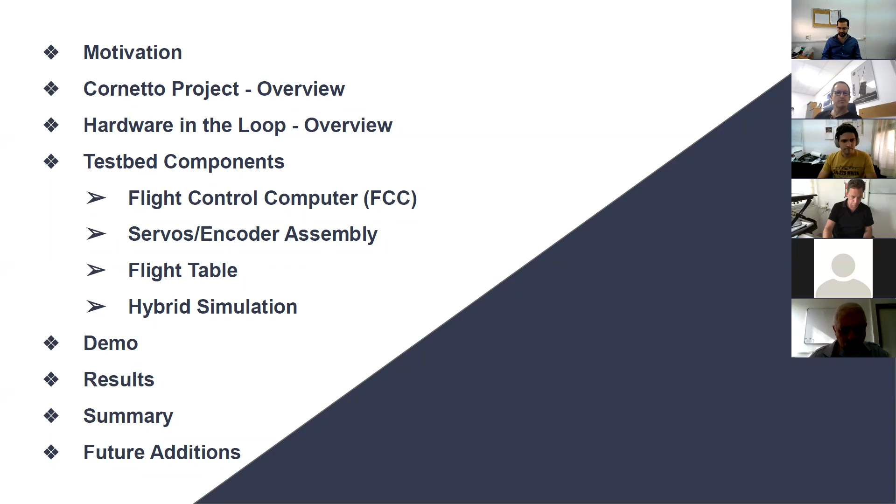Let's begin with the motivation. What we're trying to do is create a hybrid simulation for validating guidance, navigation, and control algorithms from inside the lab for a low-cost research missile. So what we're trying to do is combine physical components with mathematical models. Physical components would be those of the missile, such as the flight computer, servos, etc. And the mathematical models would be the flight dynamic model and the virtual IMU and other components that we will be discussing in just a moment.

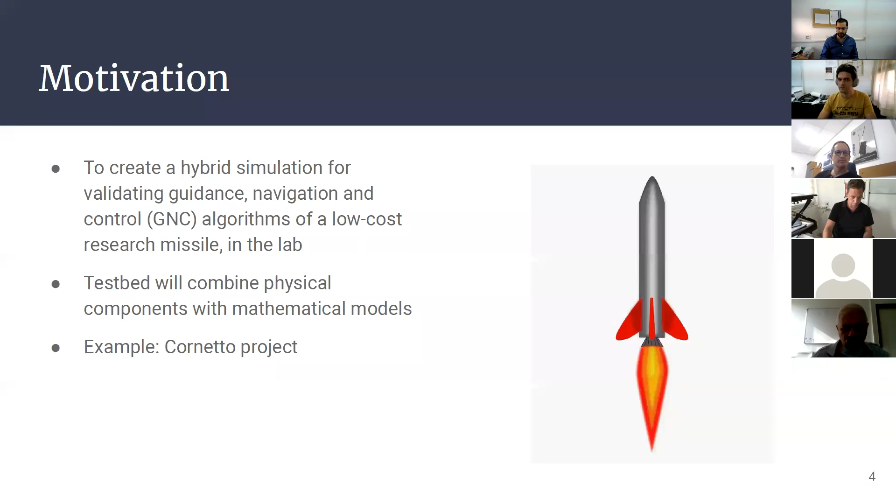Like I said, we're testing this testbed with the Cornetto project. So a quick overview on that. What is the Cornetto project? It is a project to design and build a low-cost research missile that's reusable for testing guidance, navigation, and control algorithms. The project is in collaboration with the Technical University of Munich in Germany. The Technion team consists of undergraduate aerospace students in their final year and a few master's students such as myself.

A quick overview of the physical layout of the missile. At the very front there's going to be a seeker. I say there's going to be one because as of now we're not testing any guidance algorithms, so there isn't a seeker yet. Behind this there's the avionics section, where the flight control computer goes, the GPS, battery, power distribution, and the rest of the electronic components. Behind this there's the parachute, which is in the recovery section of the missile, and this parachute is what makes the missile reusable.

Further back there are the wings. There are 4 wings, and these are mainly there to increase the range of the missile. At the very back is the motor assembly, which includes the actual motor as well as the 4 fins used to steer the missile. Each fin is connected to a servo, and that's how we generate the fin deflections. Overall dimensions of the missile: it's about 1.1 meters tall with a 90 millimeter diameter, so it's quite a small missile.

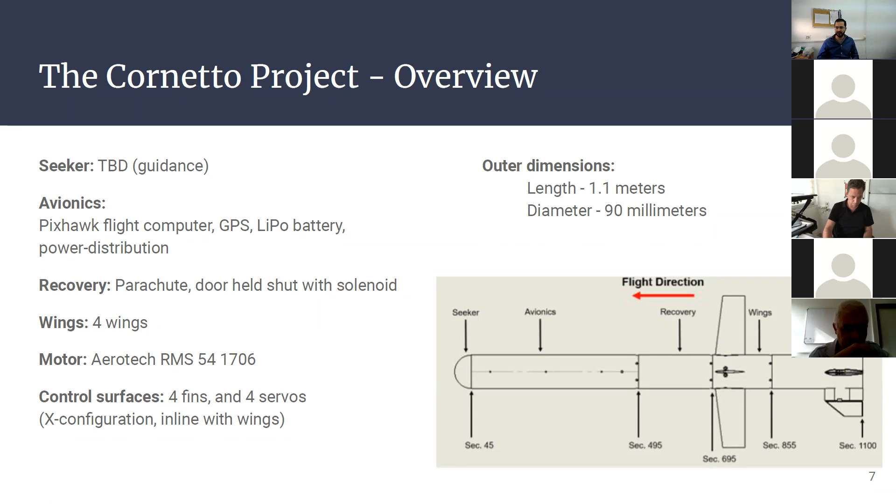Now we're going to discuss the hardware in the loop. The purpose of the hardware in the loop simulation is to validate the design of the GNC algorithms using physical components in real-time simulation. The overview is as follows: we have a flight computer, and a simulation computer which runs the flight dynamic model, which uses the fin commands to calculate the full state vector of the missile.

Part of this is the attitude. The attitude is sent as a command to the flight table, which generates the rotations that the missile would experience in flight. Inside the flight table there is an IMU, which in our case is part of the flight control computer, a Pixhawk. The IMU measures the rates and calculates fin commands by running the GNC algorithms.

I'm also going to mention the hybrid IMU that's going to be implemented. The reason for that is that the flight table only generates rotational movements, but it cannot generate linear accelerations. So the Pixhawk needs some sort of a hybrid IMU that combines the physical gyro readings with virtual accelerometer readings from a virtual IMU running on the simulation computer. So, like I said, it generates fin commands which are sent to the servos. The servos are measured by optical encoders, and these are sent to the flight computer to close the loop.

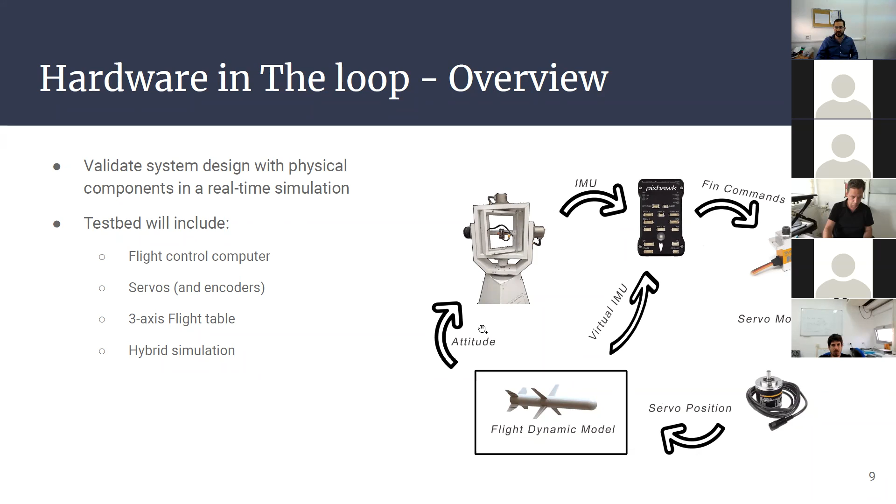So now we're going to go into depth of each component, starting with the flight control computer, or FCC for short.

The model we're using is the mRo Pixhawk flight computer, also known as the Pixhawk-1. What we like about it is that it has built-in sensors, including a 6-axis IMU, meaning a 3-axis accelerometer and a 3-axis gyroscope, as well as a magnetometer and a barometer. We're not using the software it comes with.

Instead, we're flashing our own software designed using Simulink. To interface it with the rest of the testbed, we use serial communication over USB, and we interface with the servos directly through PWM ports that send signals to them.

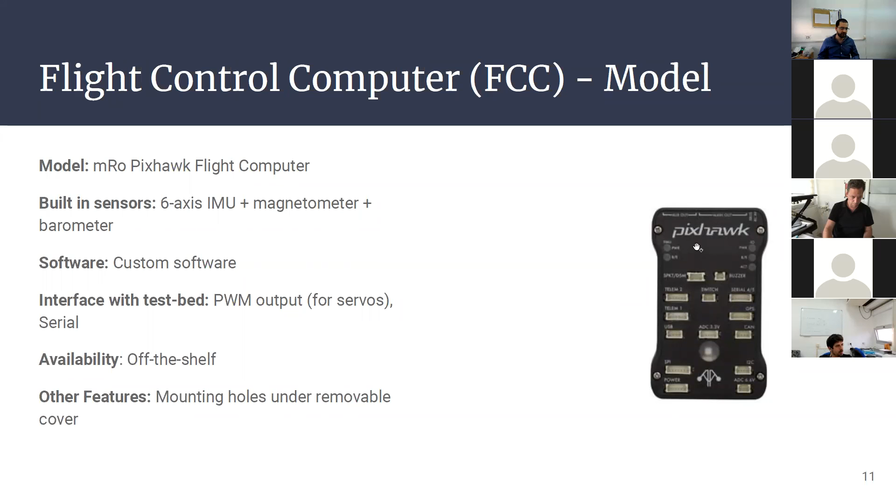This is an off-the-shelf component, so it's easy to get our hands on, and if we need more, we can get more. A nice feature is that it has 4 mounting holes once you remove the outer cover, used for a secure attachment to the flight table.

So the software we're using is custom made—this is the software I designed. What you can see here is the block for serial input. It receives input from the simulation computer through the serial input, and then sends data back over serial to the simulation computer. This entire block gets flashed onto the Pixhawk, and it operates at 100 Hertz.

The other input of the Pixhawk is the gyros right here, which interfaces with the physical gyros and measures them. It works as follows: from the simulation computer, we receive the heartbeat, which we'll discuss in a minute, as well as autopilot commands, the true state vector of the missile from the flight dynamic model, the virtual IMU data, and a few flags that control the different modes the Pixhawk can operate at.

For example, there's the IMU merge block. We can enable the real gyros flag in the initialization script, and then we'd have a hybrid IMU that takes the physical gyros measurement and the virtual accelerometer measurements to be used by the rest of the algorithms. Or if this flag is set to false, we'd use only the virtual IMU data—virtual accelerometer and virtual gyroscopes.

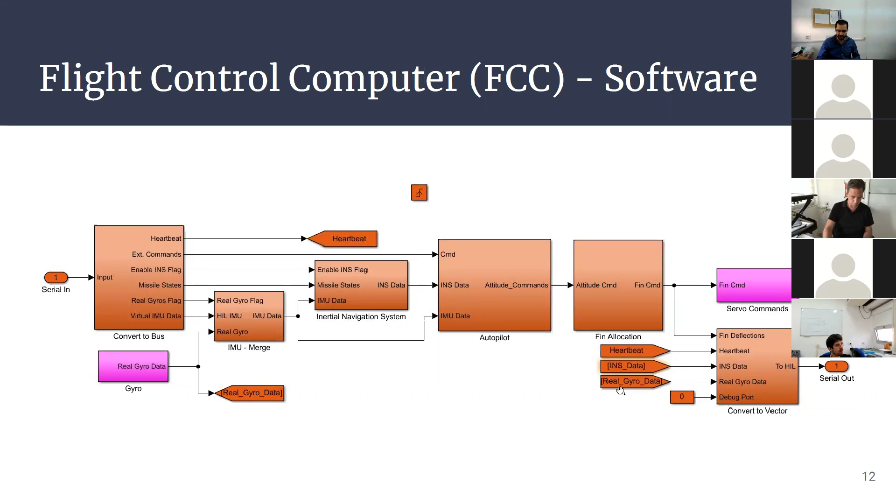So what is this heartbeat? Essentially, it's just a discrete counter generated on the simulation computer. The simulation computer sends this value with every message to the Pixhawk, and receives this value back with a response from the Pixhawk. We can use it to measure the delay in communication for a round-trip signal, and on average we measure a delay of roughly 15 milliseconds, at most 20 milliseconds.

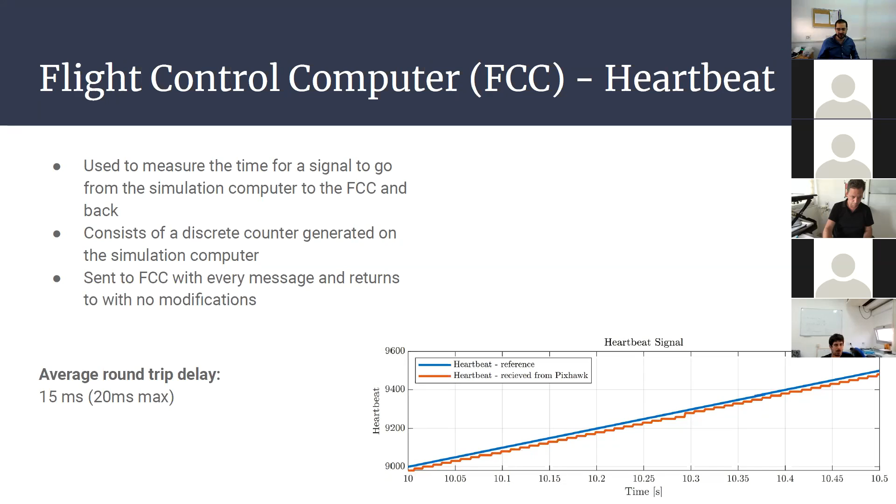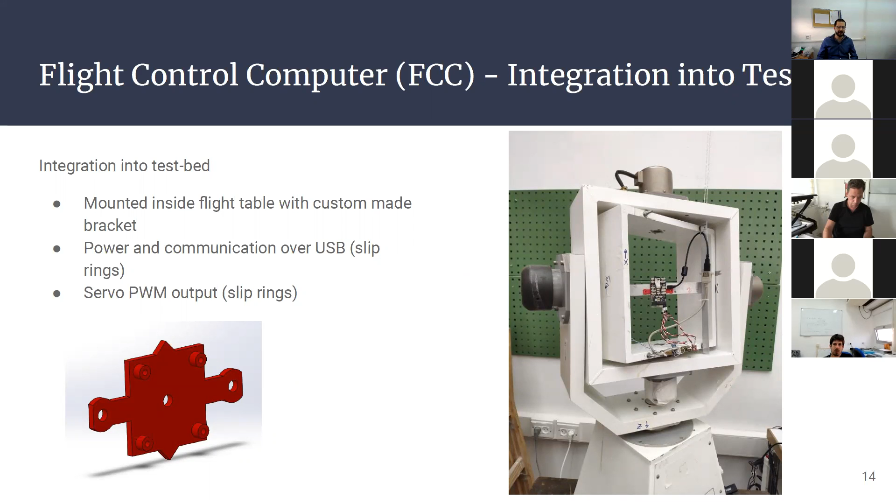So the way we integrate the Pixhawk with the rest of the simulation is as follows. The Pixhawk is mounted into the innermost gimbal of the flight table, with its IMU built in. Power and communication happen over a USB cable, routed through the slip rings of the flight table, and similarly the servos get their commands from the PWM outputs, also routed through the slip rings. The Pixhawk attaches with a custom-made bracket that I designed in SolidWorks and 3D printed.

So that sums it up for the flight control computer. Now we're going to be discussing the servos and the encoder assembly.

In flight, the missile is steered with the 4 fins at the back, and the servos move them, operating in open loop. This means we send the servos a command, and the servo tracks this command, but we don't know what the actual positions of the fins are at any given time.

In the lab, however, we do not generate aerodynamic forces with the fins, so we need a different way to calculate these forces and moments, which we do with the flight dynamic model. We need to measure the fin deflections directly in order to send them to the flight model.

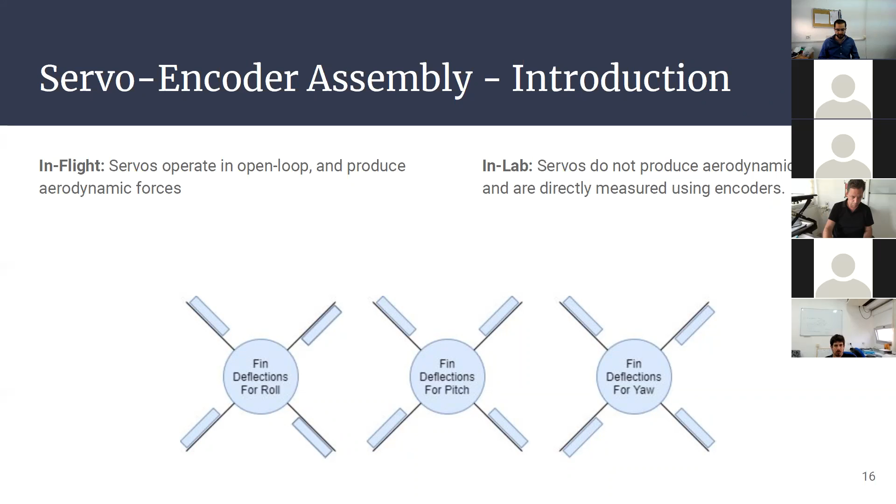So the servos we're using in the testbed are the same servos used in the Cornetto project. These are the SV1232 MG servos from Savox. They are quite high power and have a small form factor.

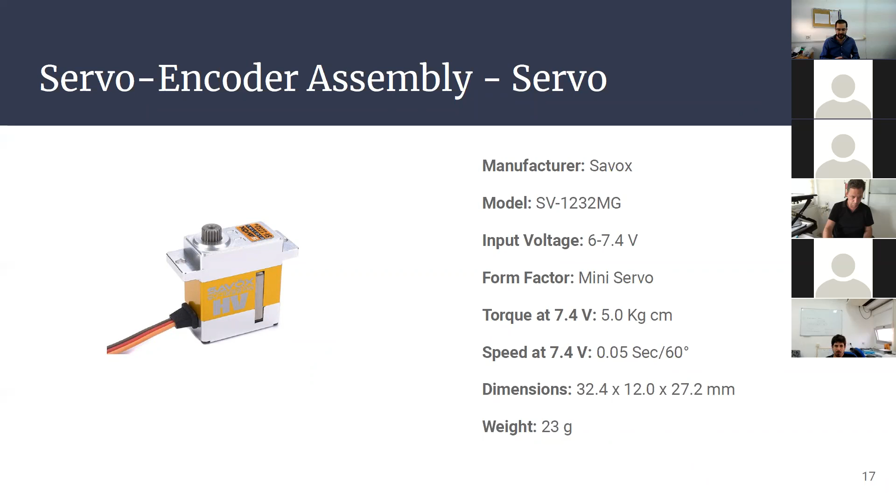The encoders we're using to measure fin deflections are these encoders from YUMO. What's important to note is that they are incremental and optical. Optical refers to the sensing technology used to measure the angle. Incremental means that every time we supply power to the encoder, the current angular position is considered zero, and from then on we track the angle relative to this zero position, as opposed to an absolute encoder, which gives you the angle with reference to some physical point on the sensor itself.

Also, the resolution of this encoder is 1024 pulses per revolution, which translates to an accuracy of about 0.09 degrees, which is higher resolution than the servos themselves, so it's not a bottleneck. I want to stress that these encoders are not used in the Cornetto missile. They are only used in our testbed because we need some way to measure fin deflections in the lab.

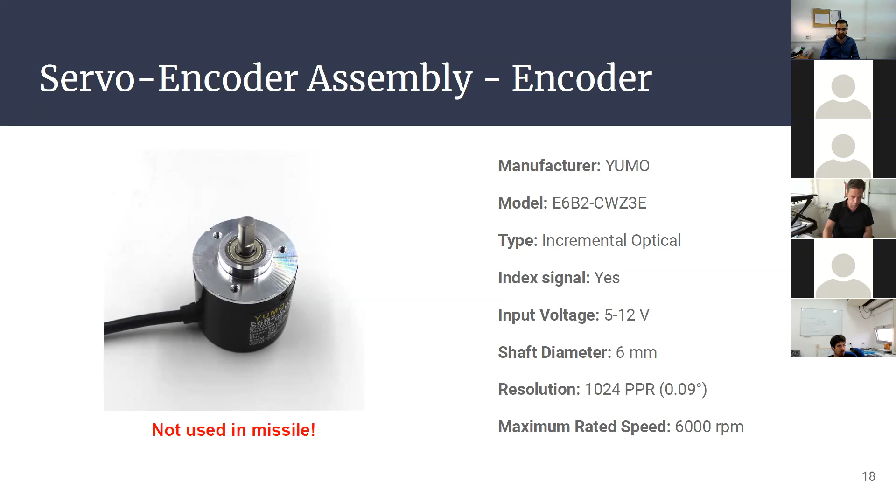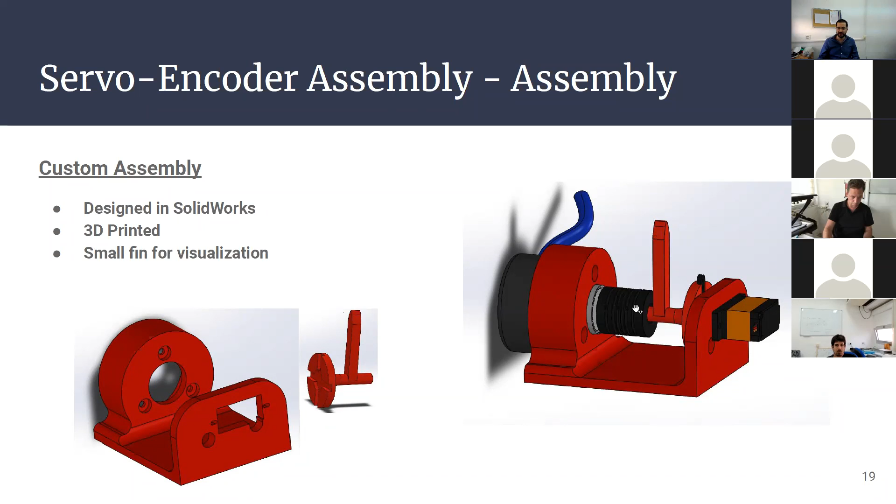The way we connect these servos and encoders is with, again, a custom housing that I created in SolidWorks and 3D printed. There's also a fin, which is here just for visualization so that the user can see the fins move. Everything is connected—the servo and the encoder are connected together with a rubber coupling.

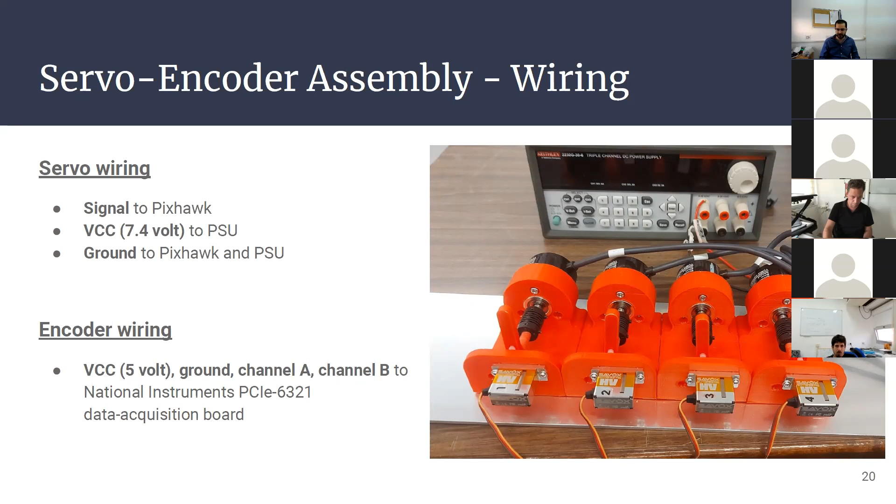Okay, the next thing we want to do is identify the transfer function for the servos. There are two reasons why we want to do this. First, we want to be able to have an offline simulation and we need to know what these servos are going to behave like. The second reason is that for designing the autopilot algorithms, it's quite useful to have these transfer functions. So the way we're going to identify the plant is using the fast Fourier transform method, FFT for short.

So what we do is supply a chirp input signal—some people call it a sine sweep signal—with a 3-degree amplitude, and frequency ranges from 0 to 50 hertz. The reason for this range of frequencies is because we want to be able to see the drop-off in gain and phase. A 3-degree amplitude is a good balance, where it's high enough that we can measure it accurately, and low enough so that we are not hitting the speed limit of the servos. Because once we hit the speed limit of the servo, the system is no longer linear, and we cannot find a transfer function for a nonlinear system.

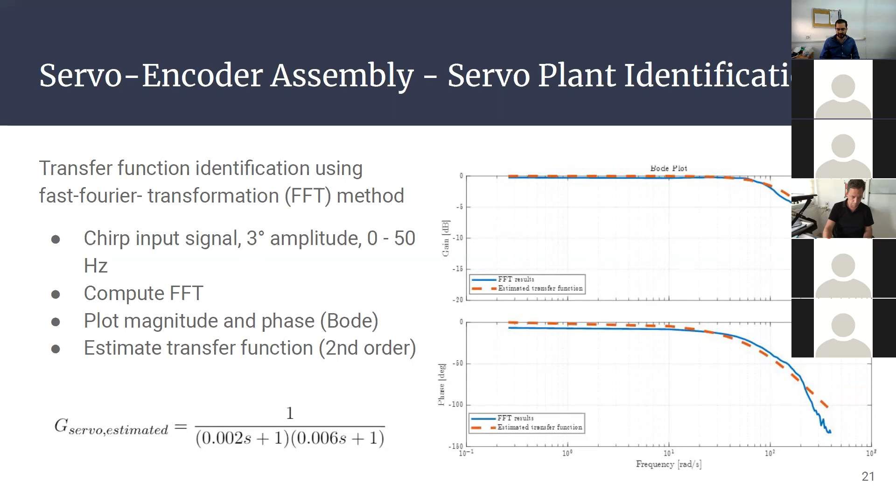The three gimbals define an Euler transformation. For example, as the outermost gimbal spins, we get a yaw movement, the middle gimbal produces pitch, and the innermost gimbal a roll movement.

So when I received the flight table, it was uncontrolled. What that means is I only had access to putting in an input of voltage between -10 and 10 volts. The output, aside from the actual angular rates measured by the Pixhawk, the signals we can receive are the raw encoder angles.

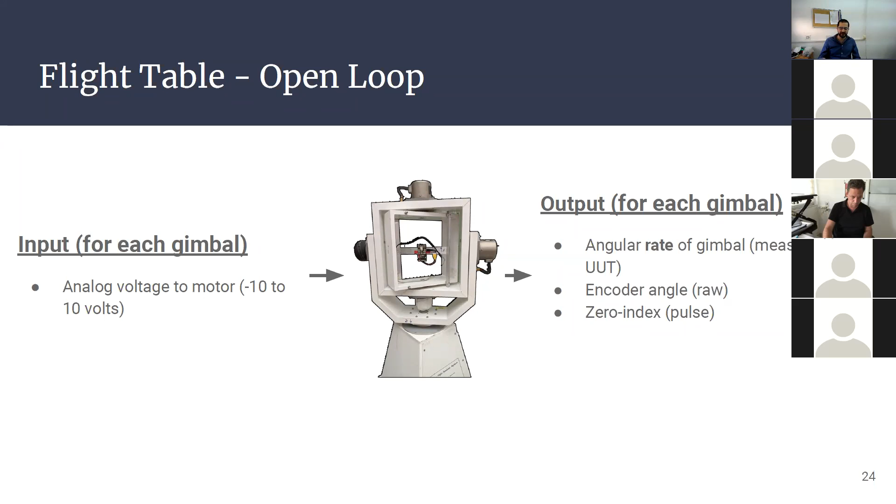These are incremental encoders, which give a relative angle, and a 0 index pulse, one for each gimbal. If we give each gimbal a 360-degree turn, we can take note of the position of the 0 index, which is a physical position on the gimbal, and use it to convert the relative angles to absolute angles. So now we have access to absolute angles for each of the gimbals.

We want to make sure that the system is in fact linear before we can start creating control algorithms for it, and we do this with a pretty simple experiment. For each gimbal, we supply a steady voltage, a few steady voltages, and we measure the steady state response, and we can plot it.

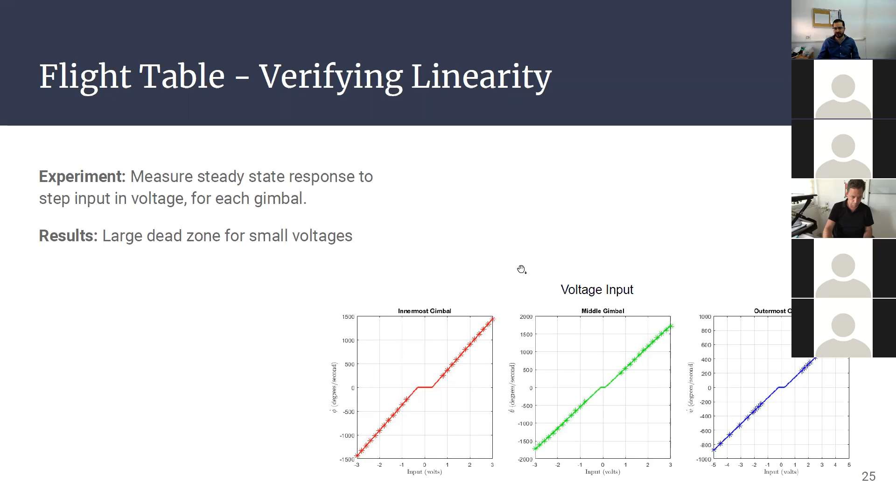What we see is that we have a dead zone for each of the gimbals. This means that there are voltages that we can supply that result in no movement of the gimbals whatsoever. This means that the system is not linear, but it's pretty easy to overcome this issue by using what we call an augmented voltage, which is going to be the new input to the system.

All it does is we add some sort of offset to the voltage if it's positive, or remove it if it's negative. Using this sort of transformation or correction, the system now behaves linearly.

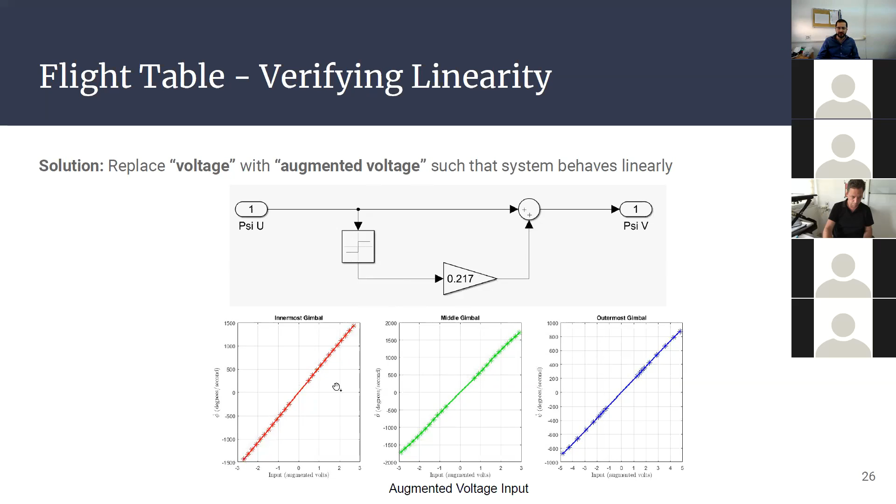Now that we have a linear system, we can do the same fast Fourier transform method to identify the transfer function for each of the gimbals. This is what we see here: the blue line are the results from the FFT test, and the red dotted line is the estimated transfer function. The resulting transfer functions that are estimated are shown below, and as expected for a brushed DC motor, the transfer function is made up of two real poles.

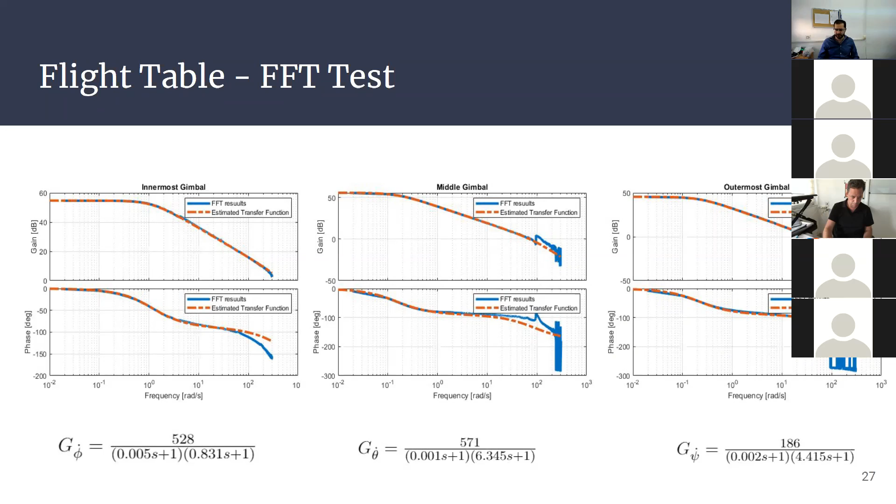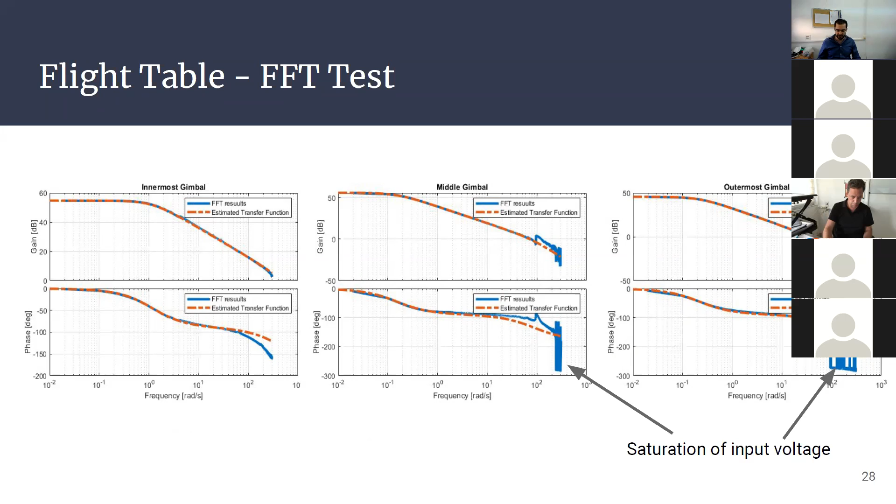You can probably see that there's some unexpected behavior at the end at high frequencies. The reason for that is because we have a maximum and minimum input voltage we can supply to the motors, plus minus 10 volts. Beyond that, we have saturation such that the system is not linear, and that's what we see here. A way around it would usually be to just decrease the amplitude of the input signal, but there's a limit to how far we can decrease it before we cannot measure the response accurately.

So what we're using for specifications is as follows: at most, an effect of 1 dB and 5 degrees due to the flight table from a frequency of 0 up until the bandwidth frequency of the associated autopilot. For example, for roll, we're expecting a bandwidth of 5 Hertz, so that means up to 1 dB and 5 degrees effect up to that frequency.

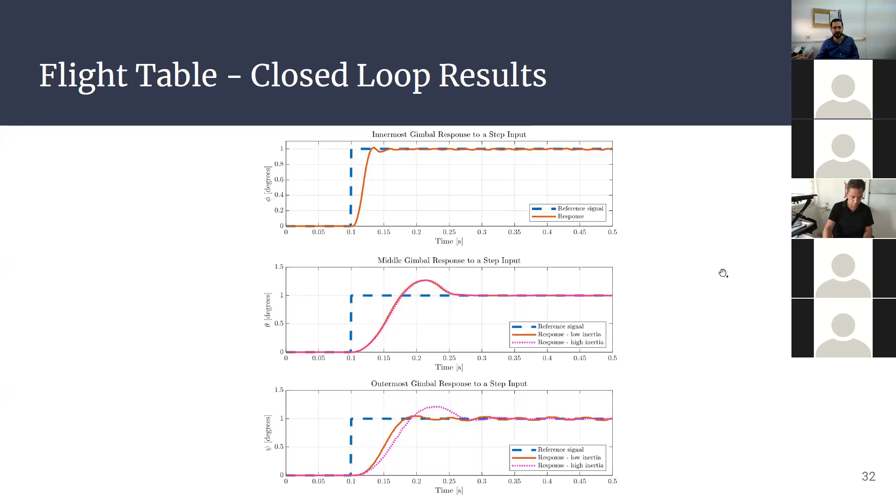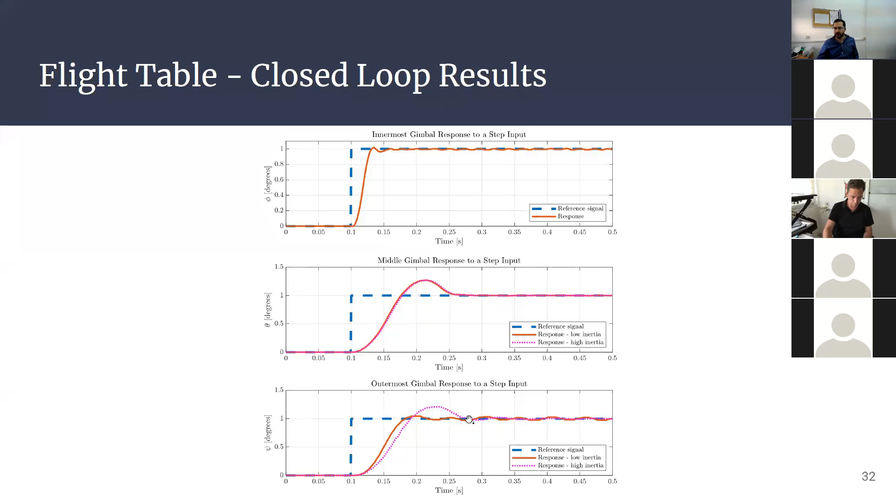This is the results to a step input. We see a fairly quick response to command in roll, and pitch and yaw, or the outer two gimbals, are slightly slower. We also see that the moment of inertia does not have much of an effect on the middle gimbal, but on the outermost gimbal it does have quite a bit of an effect, where the highest moment of inertia configuration adds quite a bit of settling time. But this is still within spec, so that's fine.

Here we're showing the flight table's ability to track sine waves. It can track both high amplitude, low frequency waves, or the opposite, high frequency but low amplitude waves, and does that quite well.

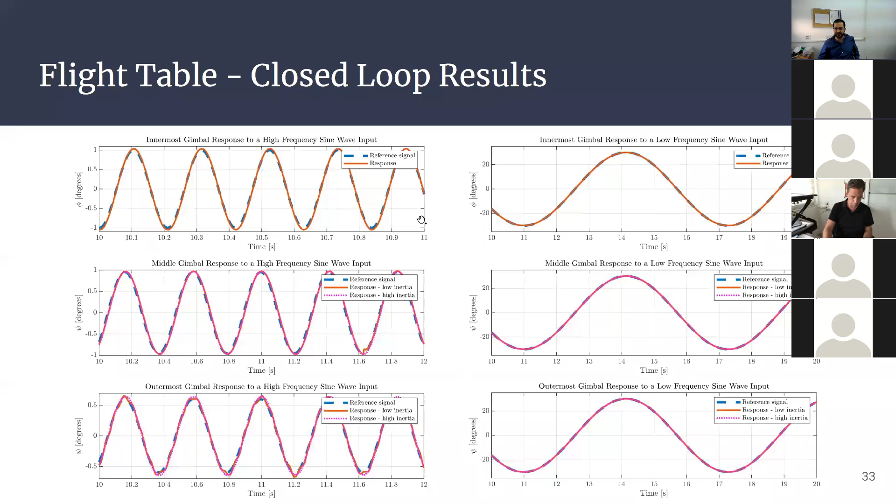Now we're going to discuss the problem of gimbal lock. Gimbal lock is one of the main issues with a 3-axis flight table. What happens is when the middle gimbal moves to a position of plus or minus 90 degrees, we lose a degree of freedom, and that's not good. The solution is to just avoid the problematic area entirely.

The way we do this is by introducing an additional rotation, such that we are tracking the attitude of the missile not with reference to the Earth axis, but with reference to the flight table axis, which is slightly different.

So what we do is, let's say the rotation from Earth to body is the regular rotation matrix with phi, theta, psi. We multiply it on the right with another rotation from flight table axis to Earth axis, and the overall effect is a rotation from flight table axis to body axis. Now we have a direction cosine matrix from which we can extract the three angles. We can call them alpha, beta, and gamma, and these are the angles for each of the gimbals.

So we can do this initial rotation about the y axis, or the middle gimbal angle, such that it starts at a position which helps us avoid gimbal lock.

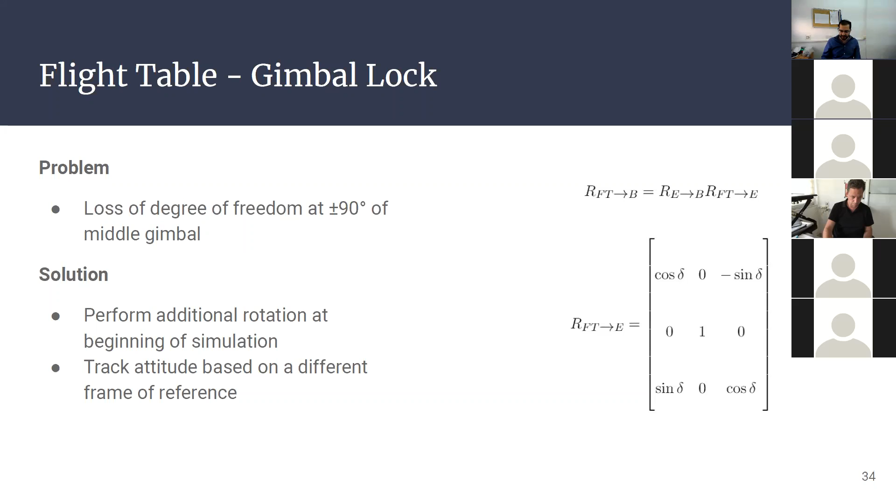Maybe this is easier to explain with an example. Let's take the following scenario: the missile is going to start with an attitude of just 0 for theta, psi, and phi. We're going to have a constant roll and yaw rate, and the pitch rate is going to follow a sort of sine shape, so first it's going to pitch up and then pitch down. The attitude of the missile, you can see right here.

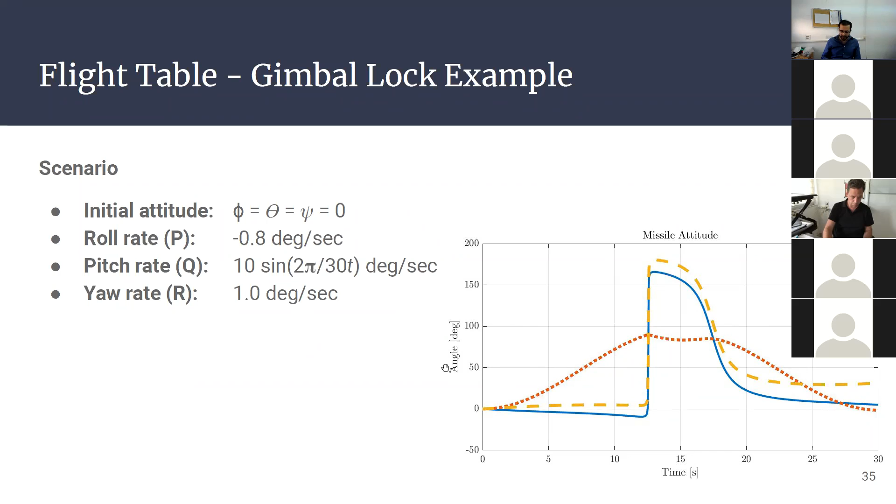If we just track the attitude normally using these Euler angles, at some point the middle gimbal would approach 90 degrees, in which case the required rates for the flight table to produce jump to infinity. So obviously we cannot track this scenario this way with a flight table.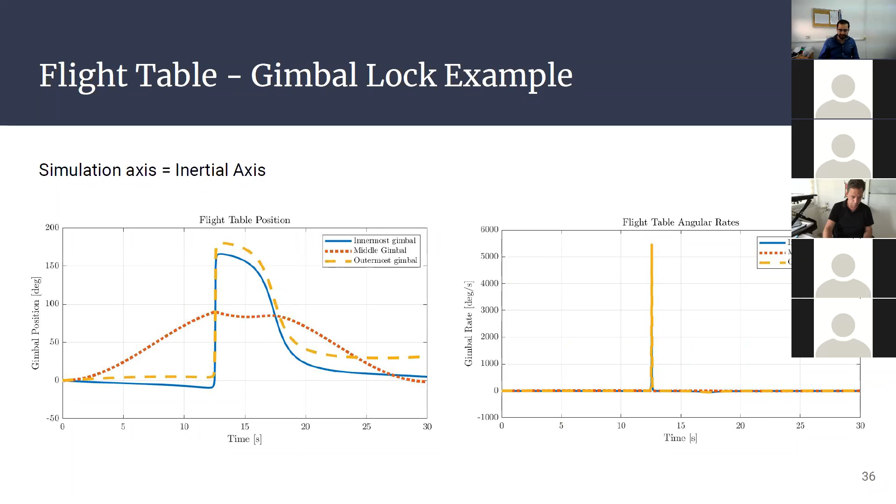However, if we start the flight table with the middle gimbal at an offset of minus 50 degrees, a rotation about the y-axis of minus 50 degrees, now we can still track the attitude of the missile, but we are going to have different angles for the flight table gimbals, such that we are staying away from the 90 degree mark, and the rates are now obtainable.

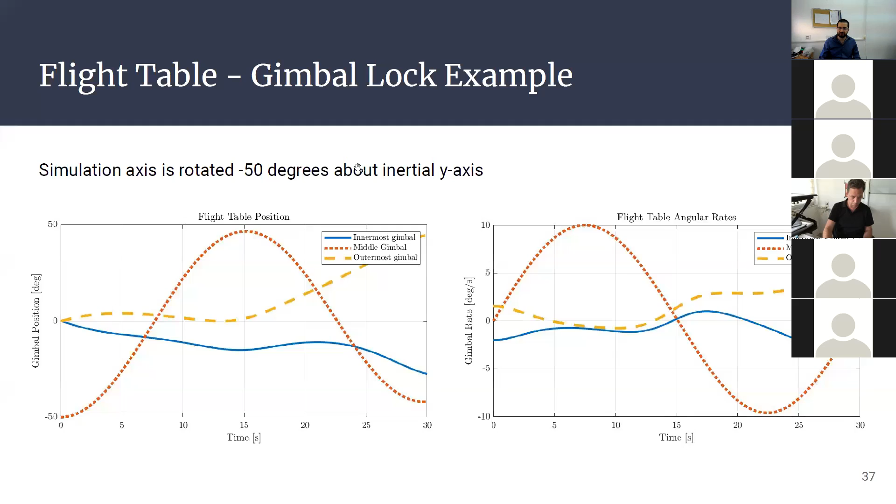So that sums it up for the flight table.

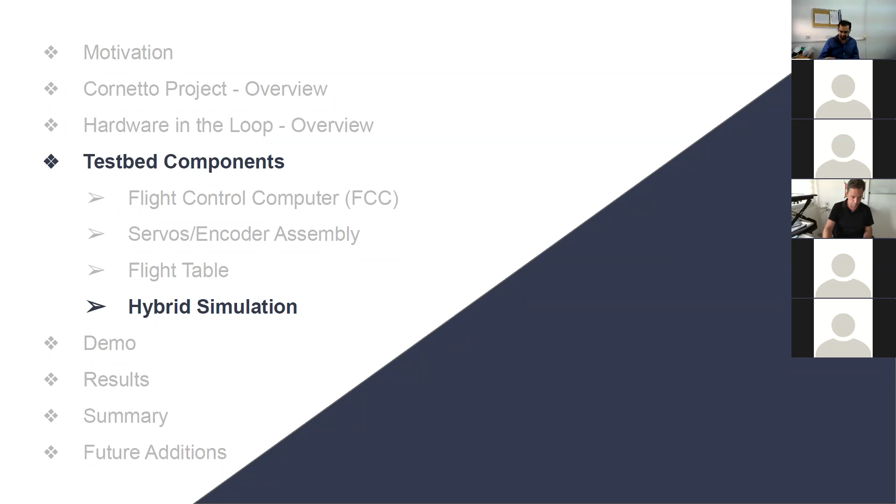Now we're going to be discussing the hybrid simulation. This runs on a dedicated simulation computer, in Simulink desktop real-time, and this is what's responsible for combining the hardware and the virtual flight dynamic model, IMU, etc. So first, we'll discuss the initialization script.

This is where we define the missile properties and the flight scenario, as well as the flags for the different modes. So we have the flight control computer flag. If we enable this flag, we're going to be using the physical Pixhawk, sending and receiving data over serial communication. If we disable the flag, we're going to actually emulate the entire functionality of the Pixhawk from the simulation. Flight table, we can either enable it or disable it.

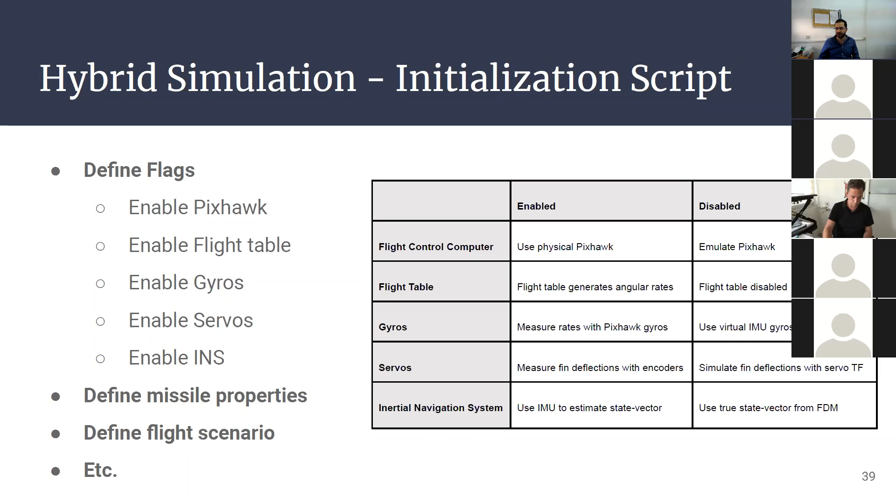Same thing with the gyros. If we enable this flag, we're going to be using the hybrid IMU, meaning physical gyros but virtual accelerometers from the virtual IMU. And if we disable the flag, then we're not using physical gyros at all, and we're just using the virtual IMU entirely. Servos, again, we can either enable them and then measure the deflections using the encoders, or we can disable the servos and just take the servo commands that the Pixhawk calculates and pass them through the transfer function of the servos. And lastly, the inertial navigation system, we can either enable it and estimate the state vector, or disable it and use the true state vector from the flight dynamic model directly.

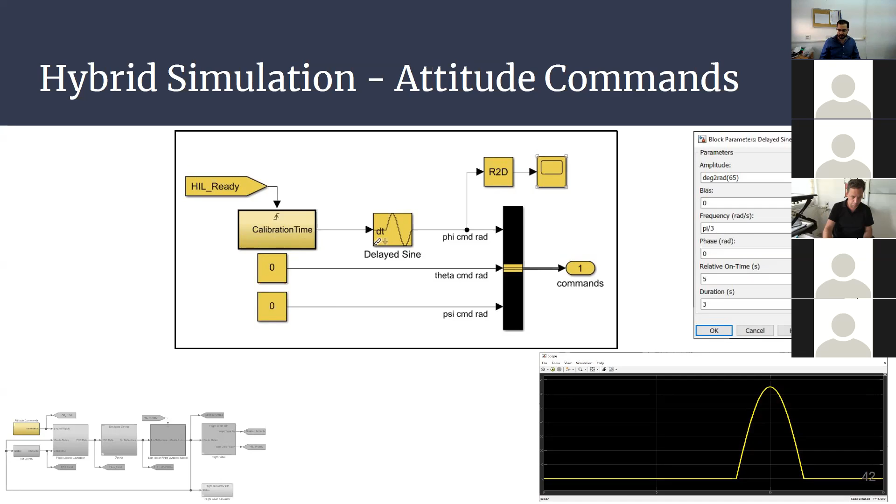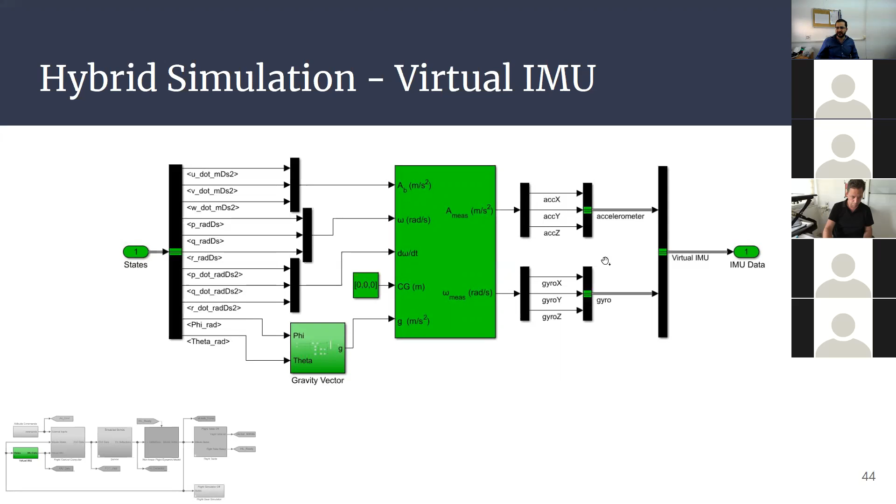Okay, so now the virtual IMU block. What it does is it receives the true state vector from the flight dynamic model. So we're using the linear accelerations, the angular rates and the angular accelerations, and the attitude in order to generate virtual accelerometer and gyroscope readings. And these are being fed to the flight control computer, as well as the attitude commands and the true state vector.

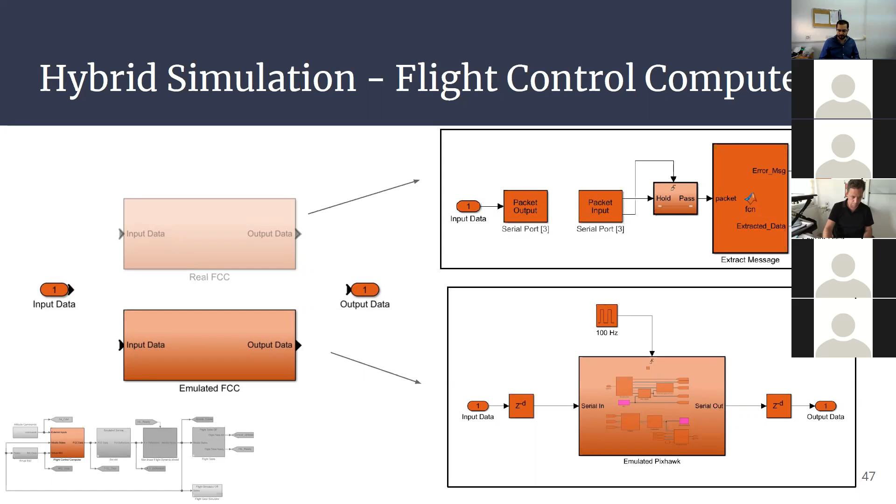So the data that's coming from the Pixhawk is being sent to the servos block. If we're using the real servos, we actually don't need the information from the Pixhawk. Instead, we're just measuring the servos with the encoders directly. And if we're not using physical servos, then we do take the servo commands from the Pixhawk and pass them through the transfer function for the servos.

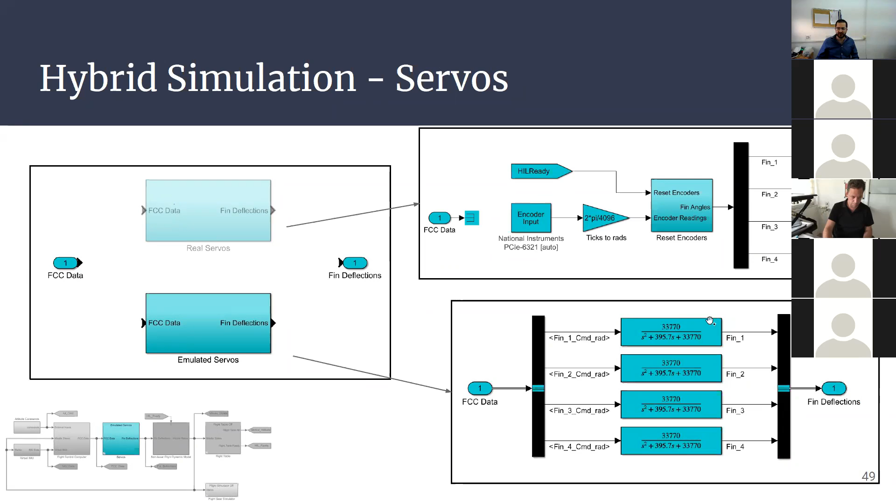Okay, so now we have the fin deflections, and these go into the nonlinear flight dynamic model. The main part of this block is the GRM airframe block, and this is the work of Thomas Lausenhammer from TUM, the team in Germany. This is a very highly detailed and sophisticated nonlinear flight dynamic model block. It takes into account everything from fin deflections to uncertainties, environment variables, and much, much more. So all we need to do is translate the fin deflections into something that this block can understand. Also, we need to give it environment variables.

And then we can extract the states that are relevant to us. We can also stop the simulation at a predetermined case. For example, we can say that we want to stop the simulation once we are at the apogee. So we define this here.

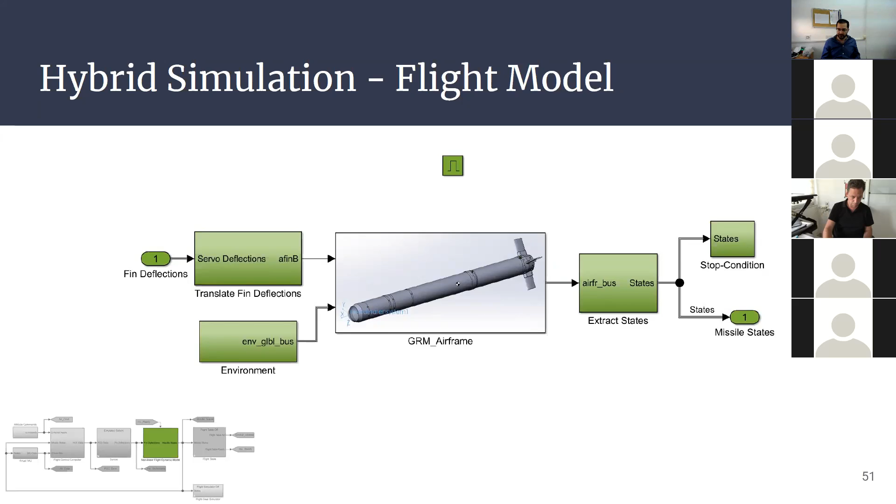This block only gets enabled after the calibration process for the flight table is complete. So speaking of the flight table, it receives the true state vector of the missile, specifically the attitude of the missile. If we're using the flight table, there's a three-stage process when we start the simulation. First, we need to calibrate the flight table, so we spin each gimbal by 360 degrees to find the zero indexes, and we use them to convert the encoder's relative angle into an absolute angle. Once we have those, we set the gimbals to move to their initial position so that the flight table is ready for stage 3.

When it starts tracking the attitude of the missile, this block translates the attitude from the flight dynamic model into the 3 gimbal angles, alpha, beta, and gamma, which track this attitude. If the flight table is disabled, we're immediately setting the flight table ready flag to true, but we are still converting the attitude of the missile into the 3 gimbal angles. This is so that the user can try different initial positions of the flight table to make sure he's avoiding gimbal lock before turning on the flight table.

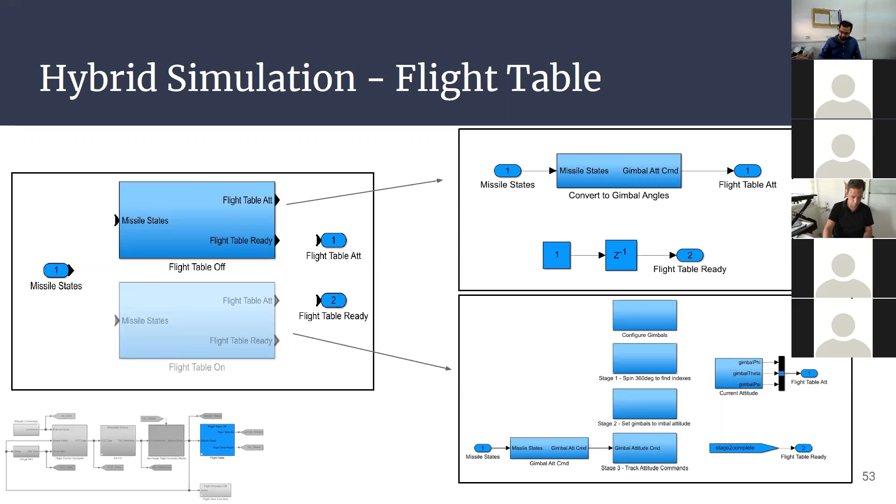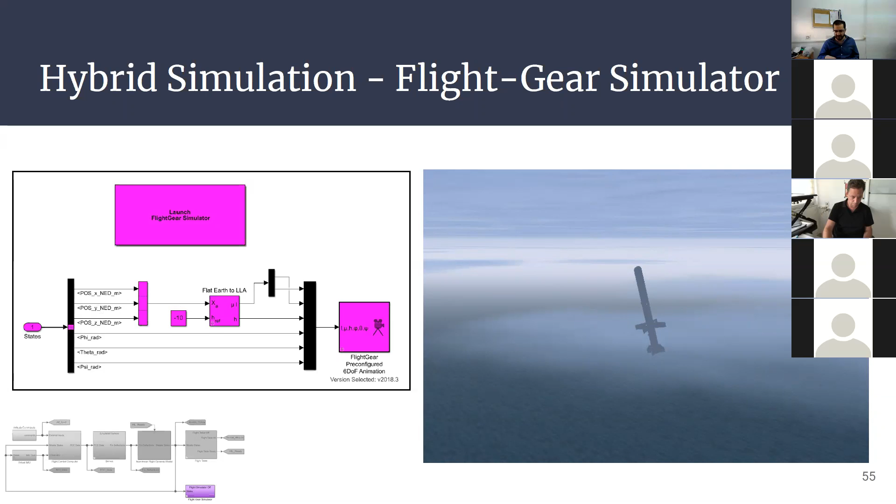Okay, and the last block is the flight gear simulator block. This is mainly a nice to have, but visualizing what the missile does using Simulink scopes is quite difficult, and so it's nice to have a 3D animation. Flight Gear Simulator is a third-party flight simulator that has a convenient interface with Simulink. So we supply it with the position and the attitude of the missile every simulation step, and it draws it in a 3D environment, which is very easy to visualize and get an understanding of what the missile is doing. The only drawback is that this functionality is only available in the offline simulation and not in the hybrid simulation.

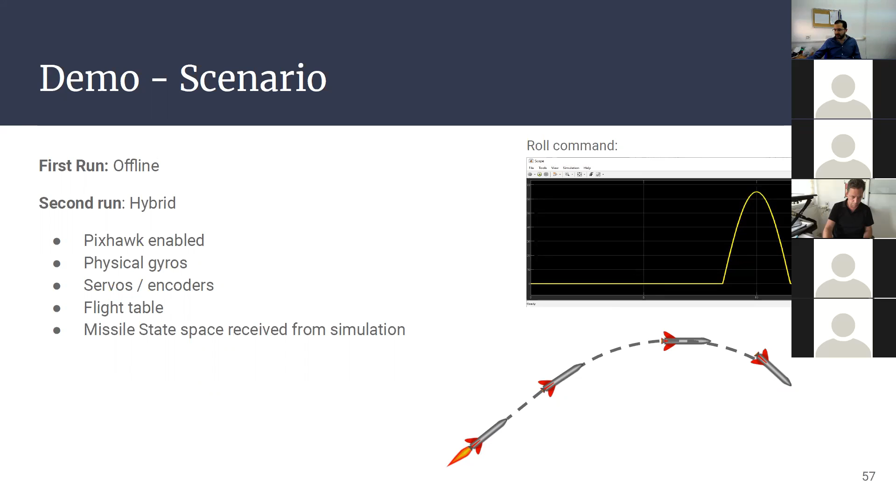Okay, now I want to show a quick demo. So the scenario we're going to be running, we're going to run the same scenario twice, once in offline mode and once in hybrid mode. In hybrid mode, we're enabling almost everything. So the Pixhawk is enabled, the gyros are being measured, and the servos and encoder assemblies is enabled, and so is the flight table. The only thing that is not enabled is the inertial navigation system, and this is just because it's not yet complete. It's the work of another master student to be completed in the near future. So for now, we're just going to be using the true state vector from the flight dynamic model directly.

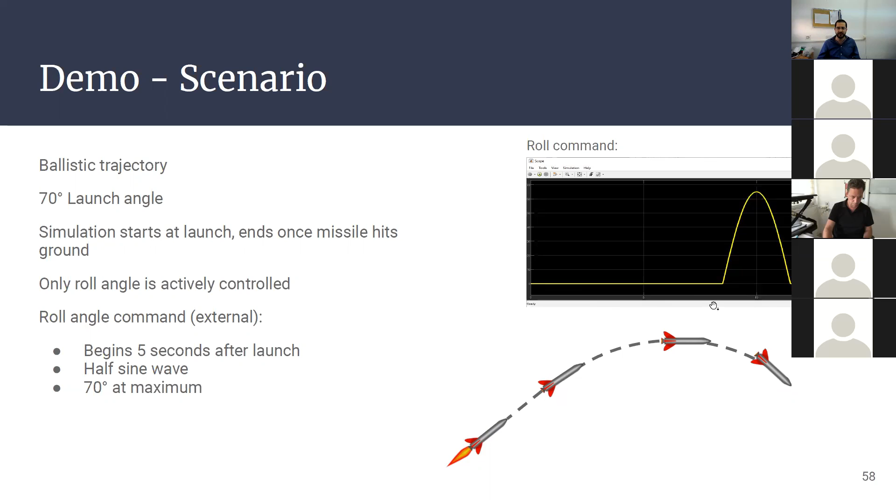So the scenario is as follows. We're going to be following a ballistic trajectory, starting with a launch angle of 70 degrees. The simulation is going to start right at launch and end once the missile hits the ground. So there's no recovery section in this scenario, no parachute, and we're only controlling the roll angle. The rest is uncontrolled, and the roll angle we're giving it just a sort of half sine wave shape, just to make sure that we can track some attitude command.

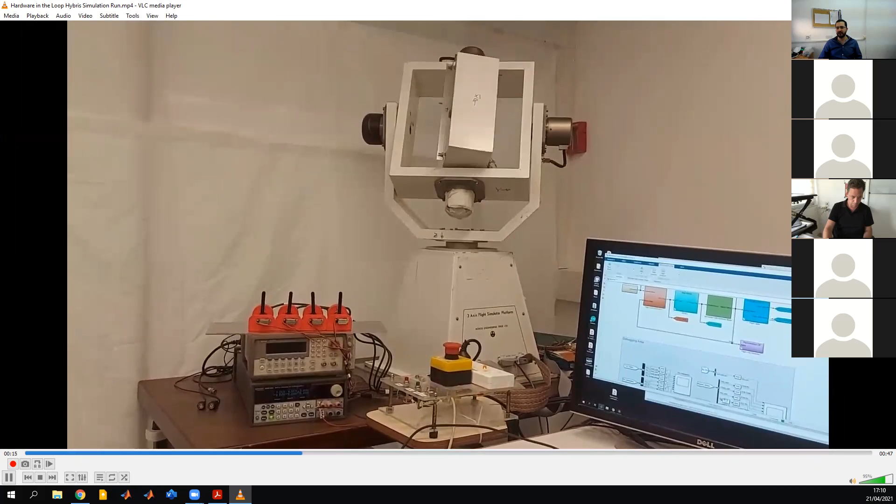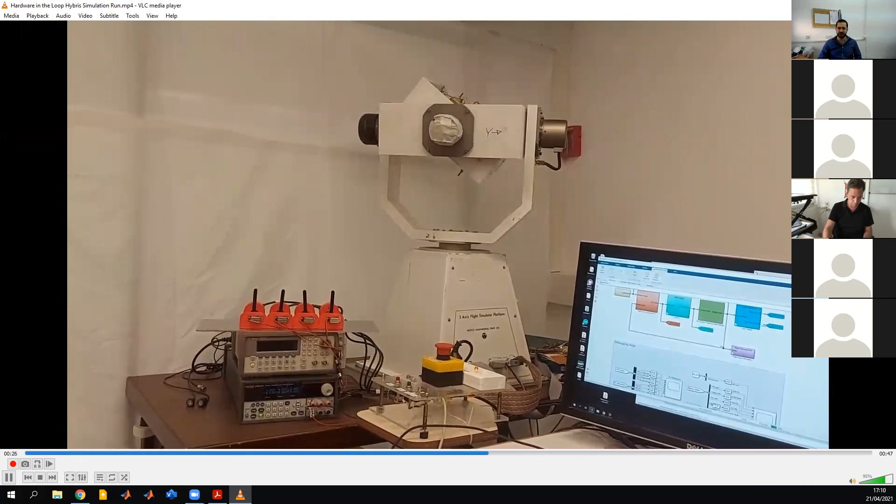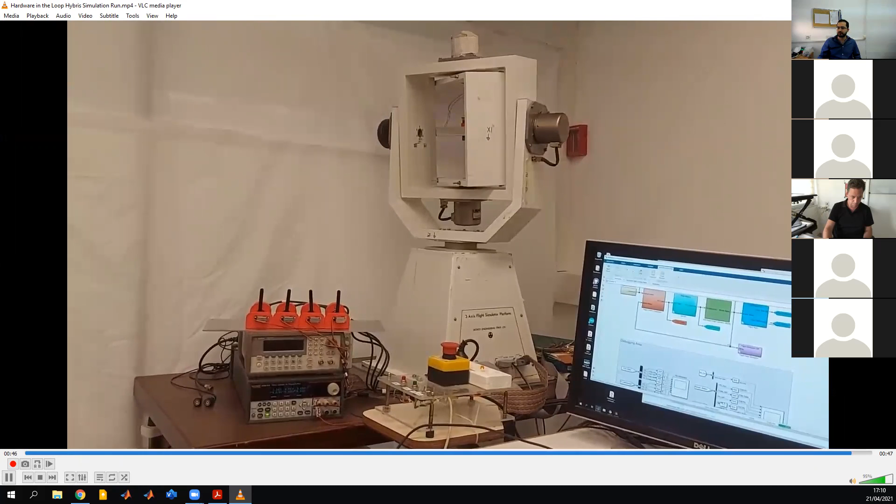Okay, so here's a video of the hybrid simulation. First thing that's going to happen is the flight table is going to do the calibration process, so that's a 360 degrees rotation for each gimbal. And now it's moving to its initial position. And now it's tracking the attitude of the missile. Here you see the roll command. Now the servos are moving, but because they're moving only a fraction of a degree, it's hard to see in this video. Okay, now the missile is close to ground, and the simulation is finished here.

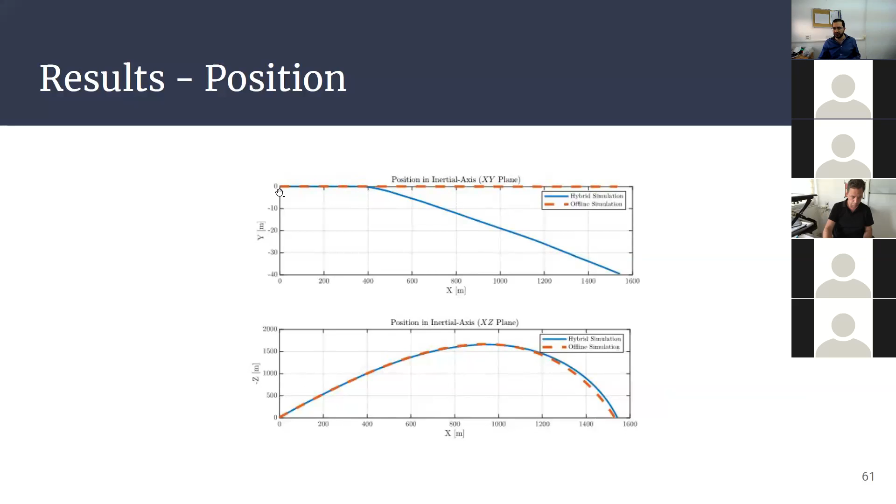Okay, so now we're going to discuss the results. For the scenario we just tested, we are not so much concerned about the performance of the missile. What we are more concerned with is how similar the hybrid simulation is to the offline simulation. So we can see that if we're plotting the trajectory of the missile in the XZ plane, the two are quite similar. However, in the XY plane, there is a divergence in the Y-axis. We're going to be explaining why in just a minute.

In the offline simulation, the servos are ideal, so to speak. Because we're only controlling the roll angle, every servo gets an identical command, so they only generate a pure rolling moment on the missile. In the lab, when we enable the servos in hybrid mode, they're not ideal. Even though they all receive the same input signal, the actual deflection can vary by up to 1 degree between the servos. This means we're not generating just a pure rolling moment, but also some pitching and yawing moments, which is what causes the missile to develop some yaw angle, and of course some velocity in the Y direction.

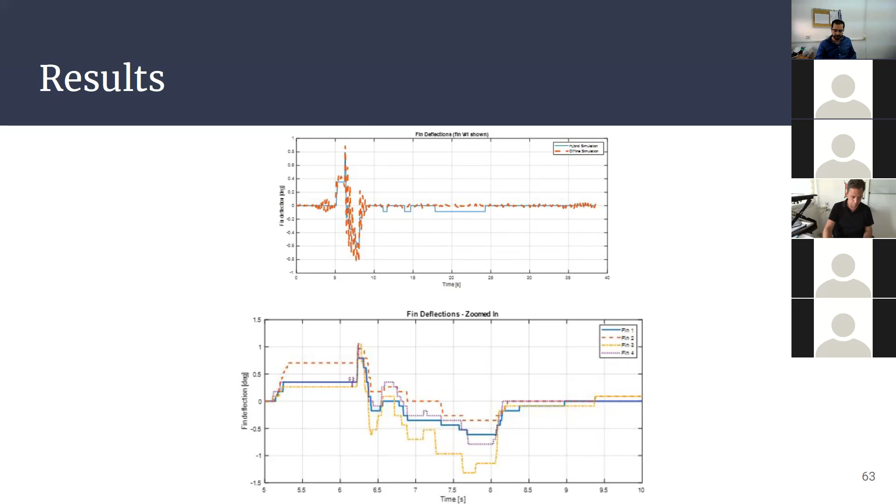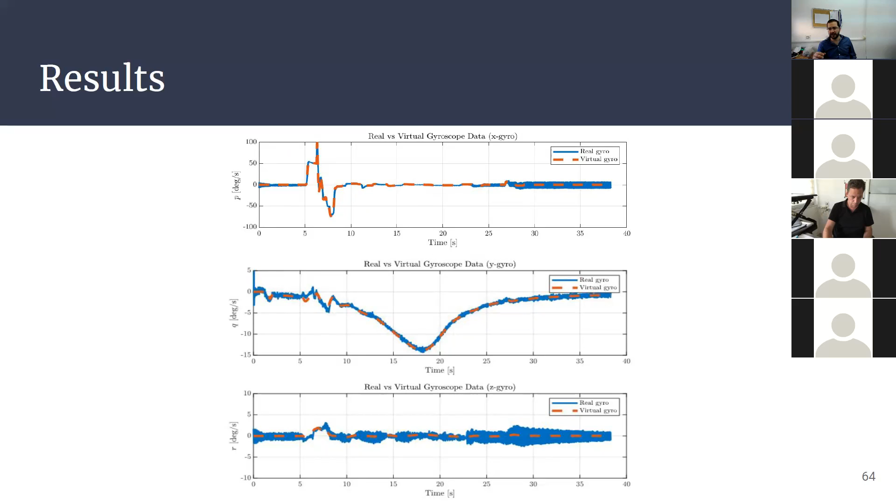Okay, so that's pretty much it. Now we're going to give a quick summary. We have a working testbed hardware-in-the-loop simulation in the lab that will allow us to validate GNC algorithms.

I have the Pixhawk, which is a flight control computer, for which I designed custom software. I also emulated it for the offline simulation, measured the communication delays and their effect. The virtual IMU was also created, and a hybrid IMU was implemented on the Pixhawk that can switch between using the virtual accelerometer and physical gyros, or just the full virtual IMU. For the servos, we identified their transfer function and designed a custom assembly to measure them with encoders. For the flight table, we also identified the transfer functions, developed control algorithms, and dealt with the problem of gimbal lock. And of course, the actual full hybrid simulation I created runs in real time and integrates this hardware with the mathematical models for the flight dynamic model.

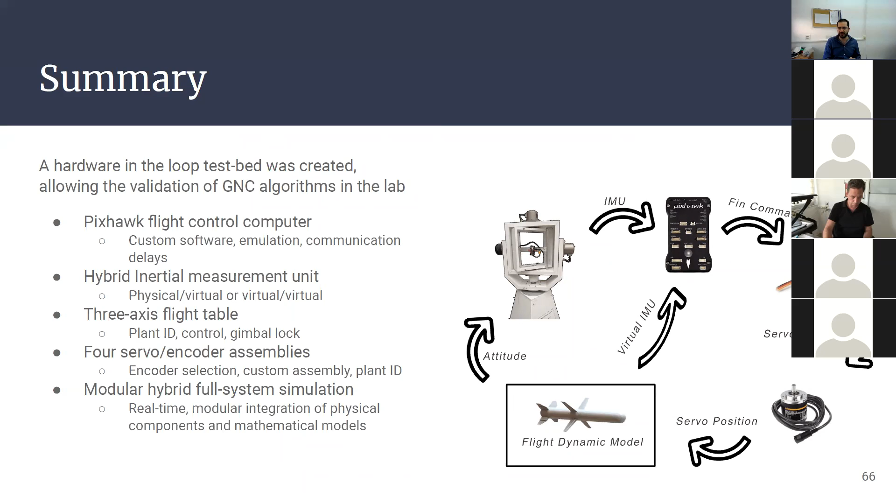So that's pretty much it. Just some future suggestions for improvement.

Like I said, the communication delay between the Pixhawk and the simulation computer is quite large, so it's important to try to minimize this delay, either by experimenting with different communication protocols, or maybe even using an entirely different flight control computer.

Also, the servos—the fins in the final missile, once in flight, are going to experience loads due to aerodynamic forces, which can affect the transient response. So it could be useful to generate these loads on the servos in the lab as well, and also model their non-linear dynamics rather than just the linear transfer functions, to have a more accurate representation of the servos.

Also, the IMU noise characteristics can be identified and added to the virtual IMU. And lastly, of course, we can add more hardware to the loop, such as the GPS simulator or a seeker later down the line.

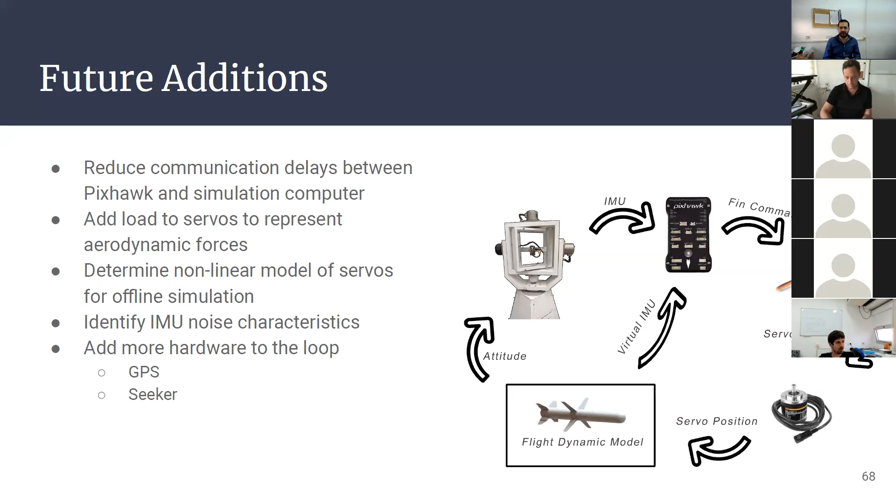So that's the end of my presentation. Thank you for listening, and if you have any questions, I would be happy to answer them.

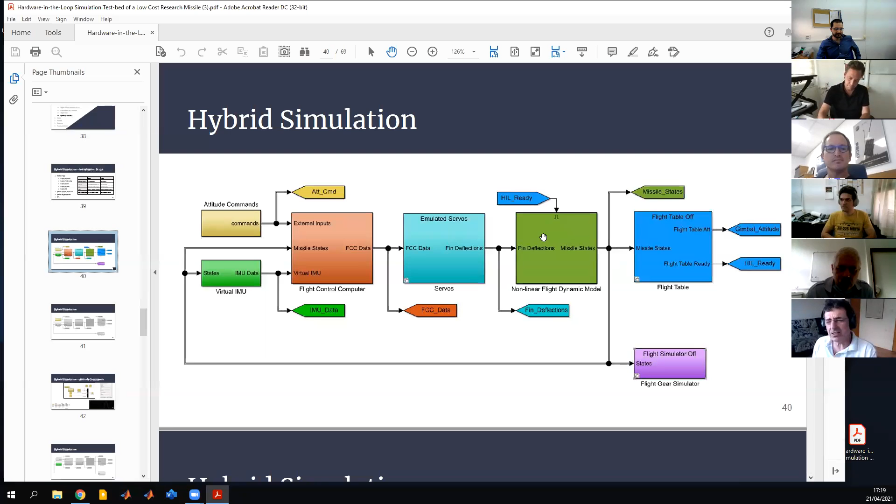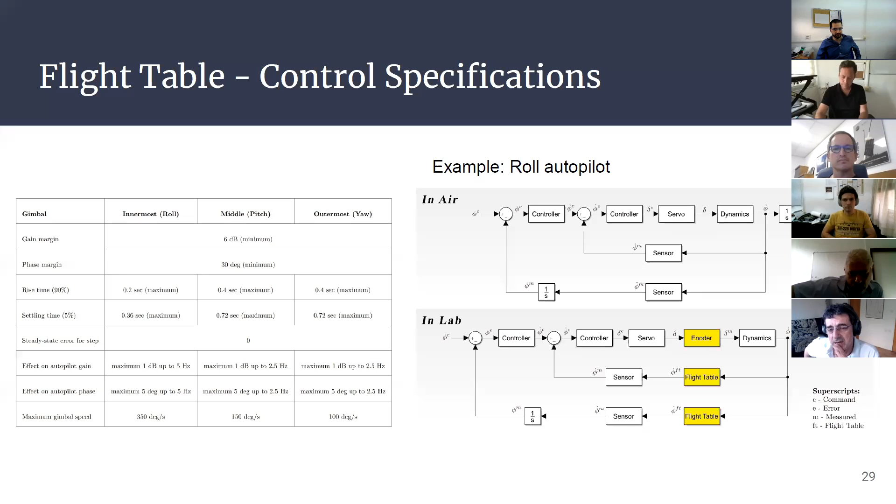If I may, Guy, very nice presentation. On slide 29 and 30, where you talk about the controllers of the flight table - yeah, exactly those, if you can make them larger, full screen, thank you. Here it seems like you're only measuring rates and your position control is like an integrator on the rates.

And in the next slide, it seems like you're measuring only the attitude, and in the feedback, the washout filter or whatever you have, it's like you're taking a derivative of the encoder. So this S in the numerator is like an approximation of a differentiator. So which one is it - do you assume you're measuring only rates or only attitude? And the consequence is, do you differentiate or integrate, or at least approximately, which is prone to noise difficulties. If you integrate you could have drift, and if you differentiate, we know what differentiation of noise does. So which one is it?

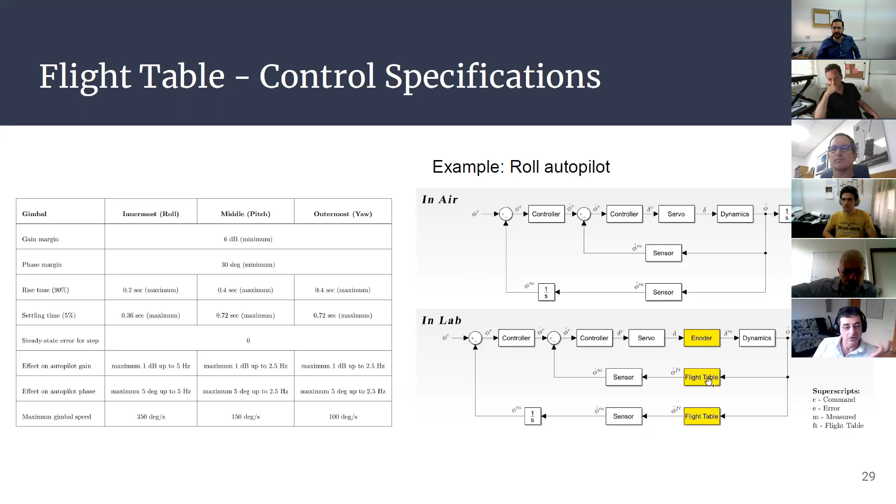So to clarify, what we see here is just the roll autopilot, a general block diagram just to explain the effects of the flight table. Now this diagram is the actual control loop for the gimbal itself. We only have an optical encoder, so we're only measuring the angular position of the gimbal. And yes, we're differentiating this signal to get the angular rate of the gimbal for the inner loop. This was tested, and the noise added due to differentiation doesn't have too big of an effect, and the system is still working well.

Was that just guessed that it works okay, or is it based on the noise characteristics you expect, besides also the encoder? I think it's discrete, right? So it could be very jumpy. Right, so when testing this, I also had a separate offline simulation for the flight table, which included everything from saturation blocks to quantizer blocks, etc. So I have an offline version of the flight table which I could test against.

And yes, you're right, we're using a differentiator to differentiate the encoder measurements, and in this case a pole at -100, this low pass filter was found to work quite well. Actually, no, hold on - this is a high pass because of the S at the origin. If anything, it's a high pass. Yeah, it's a differentiator, and then - well, it's a high pass, it goes up and then straightens out, so it's not a low pass.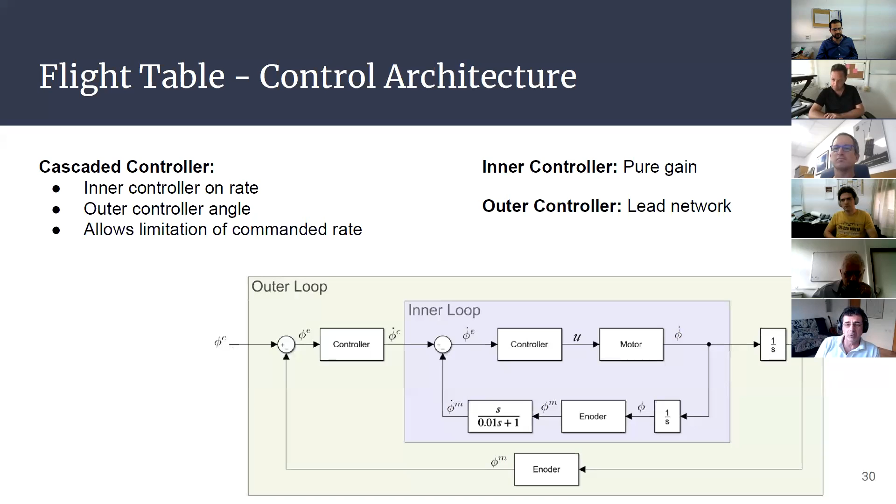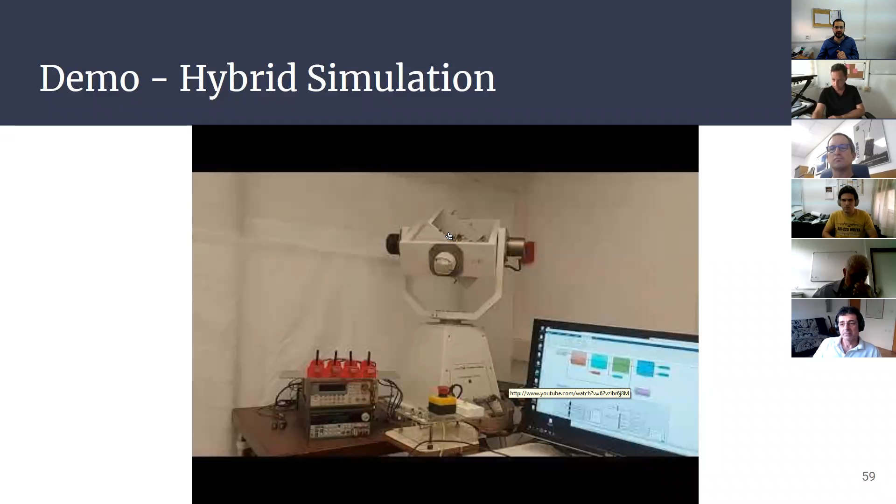Which, right, so this is actually how the payload is mounted right now - the picture is not very high quality, but right now it's actually with a roll angle of 0. It's just that the way the payload attaches to the innermost frame is with a bracket. Maybe I'll have a better picture over here - so this is the innermost gimbal, and there's a bracket that goes from the front to the back, and so this entire payload is sort of on an angle. So when the payload is level, the inner gimbal is at, I don't know, 20 degrees or something.

Yes, but also it doesn't actually matter because we're only measuring rates. So it doesn't - well, you're trying to emulate the attitude of the missile, so it is important. But the missile is rotated a little bit relative to the gimbals. Okay, that's fine, thank you.